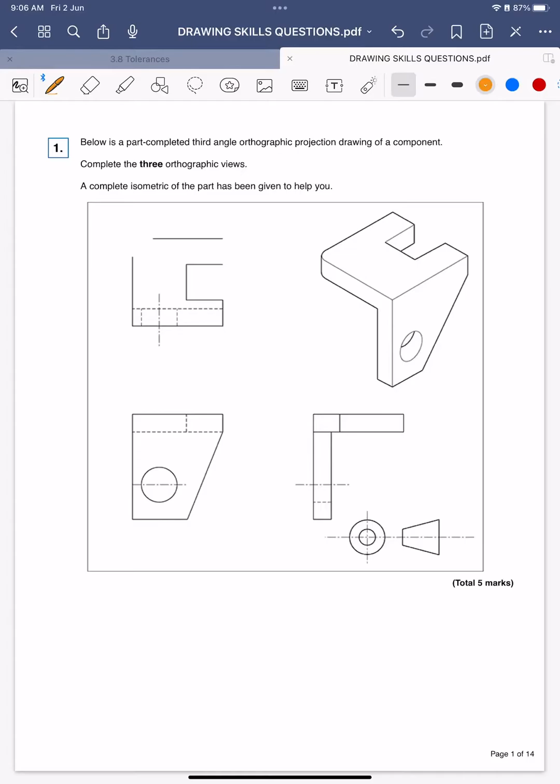So here we go, let's do an orthographic projection. This is literally just taking a shape that they'll give to you in 3D and then trying to draw what the individual reflections of it look like. So they're basically saying, here's a 3D drawing, and then we want to look at that side in isolation and then the top in isolation, and then we've got to work out the different views.

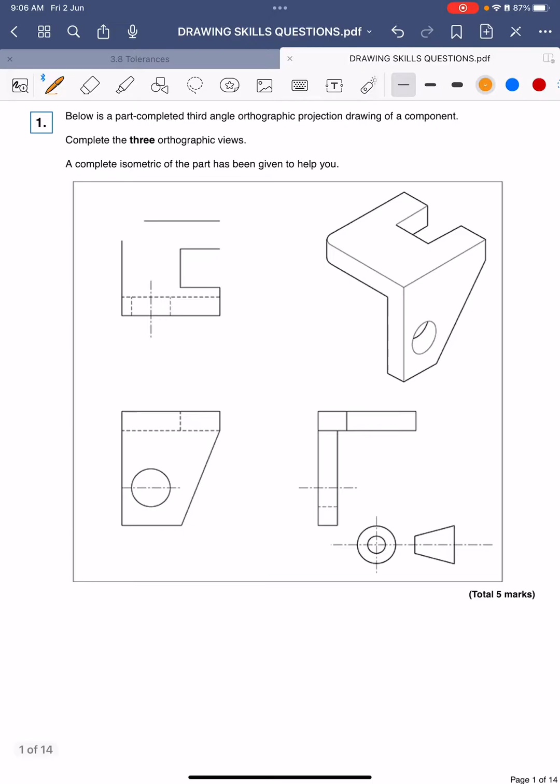So the first thing to do is we've got to work out where the different views are coming from. So we'll start with the bottom left one. We always start with the bottom left in orthographic drawing, because then we project out that way and then we project up that way. So this is the front face, so we know that's set, so I'm going to put F for front on there. Now from the front view, imagine we're standing facing this shape in that orientation. The top view, I think we can safely assume, is the one that is on the top there.

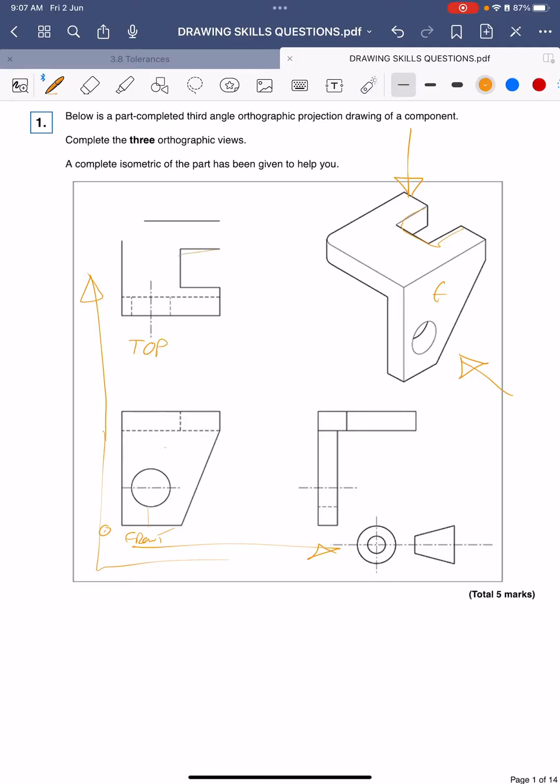And with orthographics like this, when you're starting at the origin, this point here, it rolls up like the side of a bath or up the side of a bowl, so the part rolls up and then you see it from the top, and we can see that because then you can see these cutouts in isolation there. So let's look at this first. This is basically fill in the missing gaps. So a good way to go about this is to just look at the lines that we've got and see, well, okay, there's some gaps here. We've got to figure out what to do.

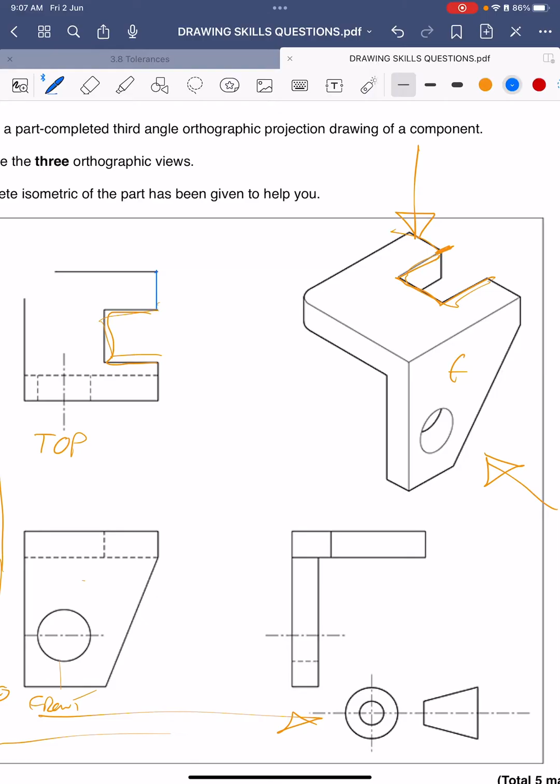So we've got this gap here. Where is that on the drawing? So we've got the cutout, first of all. So let's find the cutout on the 3D view. There we are. Okay, so the cutout finishes there, and then we've just got another line. So I think we can safely assume that we can simply draw a straight line with a ruler down there. Okay, so we've done that.

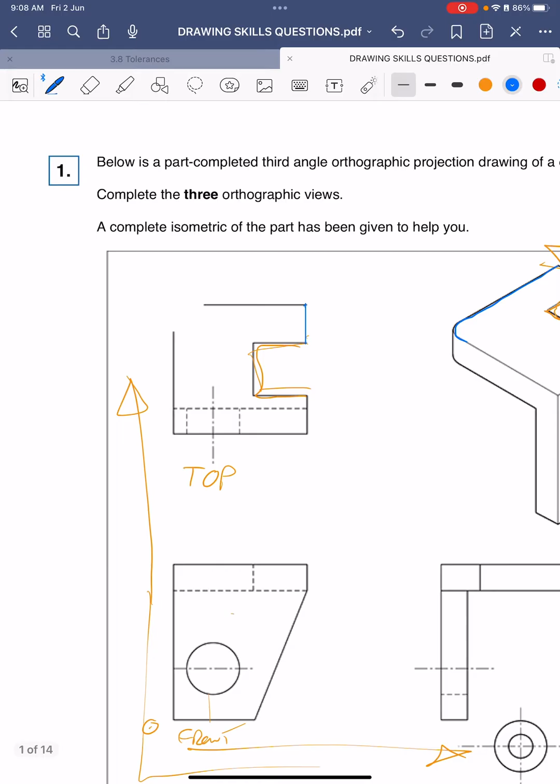We've got another gap to the left, so we can go down here, and then, oh, lo and behold, we have a radius. So we need to just join that up as best as we can with a radius, and to be honest, it doesn't need to be bang on. As long as you show that it's curved instead of being sharp, that's fine. Now that is everything on there, because we've got all those edges all done and dusted. The dotted lines here are just the hidden lines, so it'd be like seeing that edge underneath, and also the hole in 3D as well, what that would look like from the top.

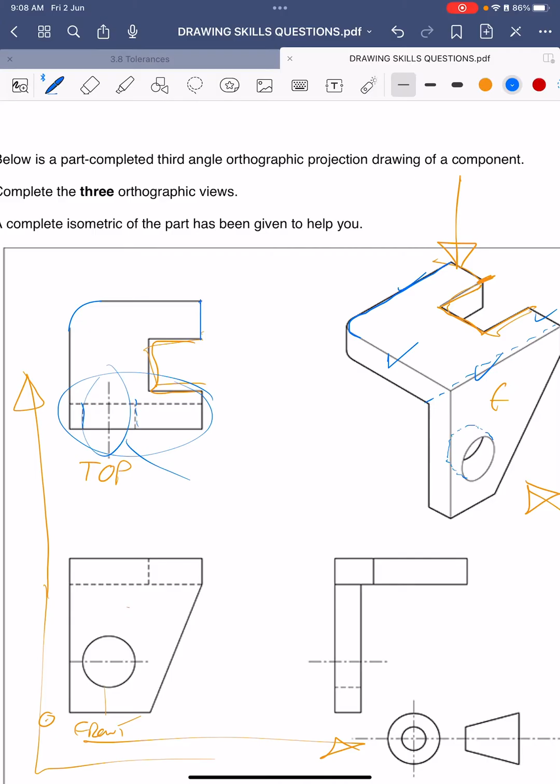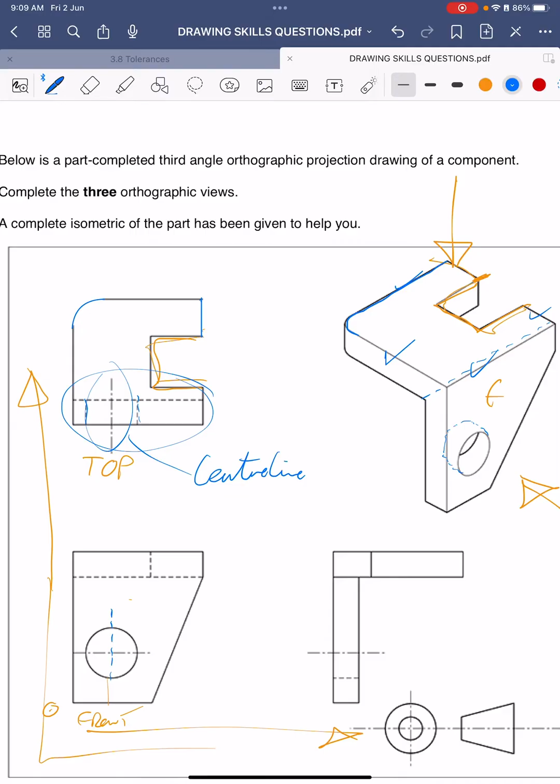So then this line here is called a center line. And the center line actually technically would carry on down all the way to the bottom, because, oh, I didn't do that very straight, did I? Let's try again. So the center line needs to carry on down to the front view, because then it shows that that circle lines up with those lines there. All right, the front view, I don't think we have to change anything on here. Oh, sorry, front view, yes. They do want the center line there, so we just put that in there to show that that's a circle. Okay, let's move to the next view.

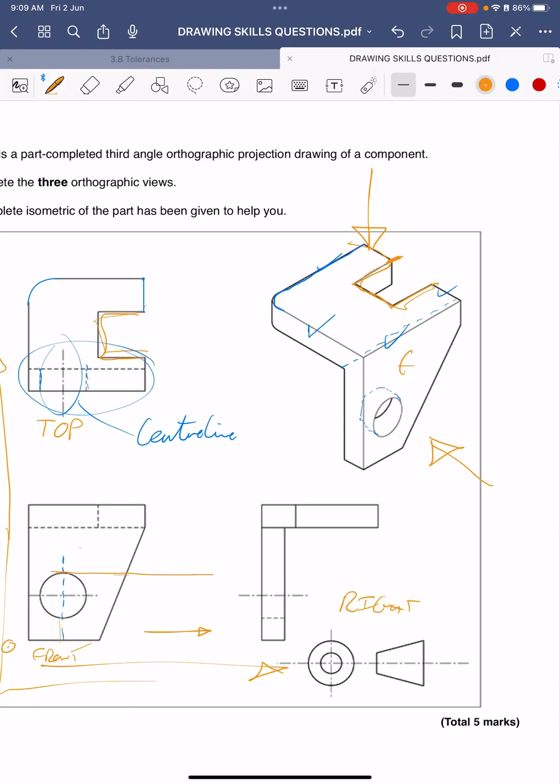This one is on the right-hand side of the front view, because we go from the front, and then we're going to go to the right here. The good thing with projection drawings is that everything's meant to line up. What it's basically saying is, we are missing the hidden lines for the circles. So if I draw across a straight line from the top and bottom, you can see they've given us the bottom one already, so all we need to do is just do a dotted line there.

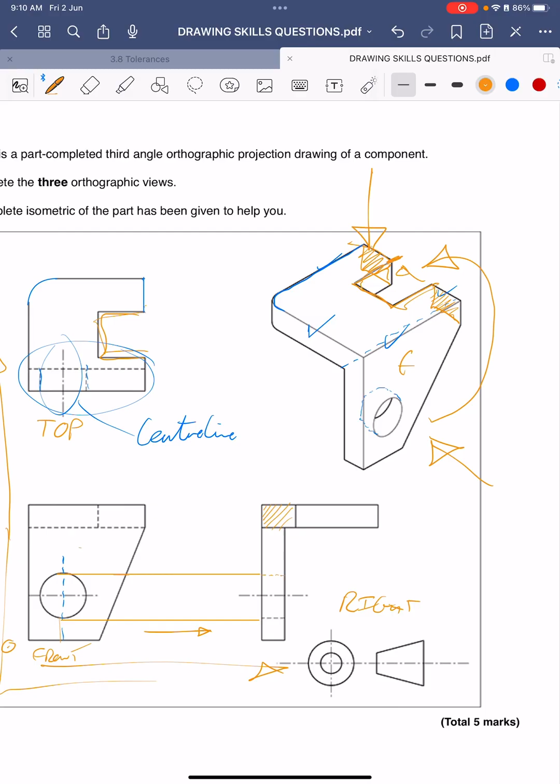Now the other thing that they haven't shown is, because this is the right view, looking at it from the front here, we go to the right and round the side, then we're looking at it from the right-hand side. So what we are trying to visualize here is this little edge here is actually going to be the front of that one there. Then there's going to be a gap, and then we've got to do the front of the other bit there. So literally all we need to do is just draw another line, and that's it. And then that's your projection drawing.